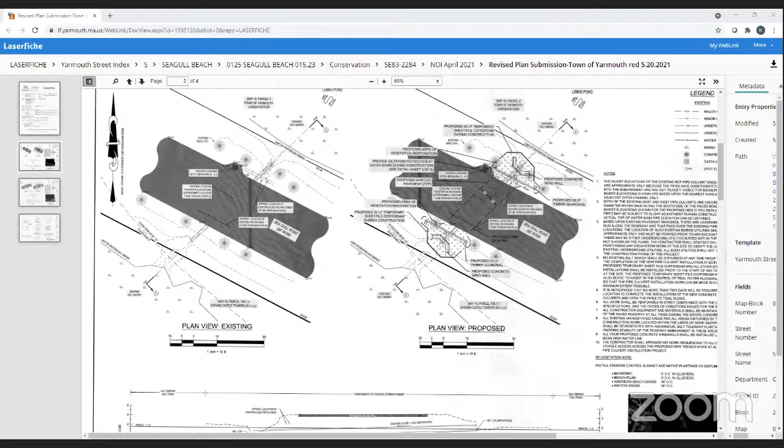Well, I think we should certainly suggest to the DPW and the engineer to do that, because sure enough, it will fail again. Yeah, and certainly from an environmental standpoint, there are impacts every time this washes out, sediment enters the water body there.

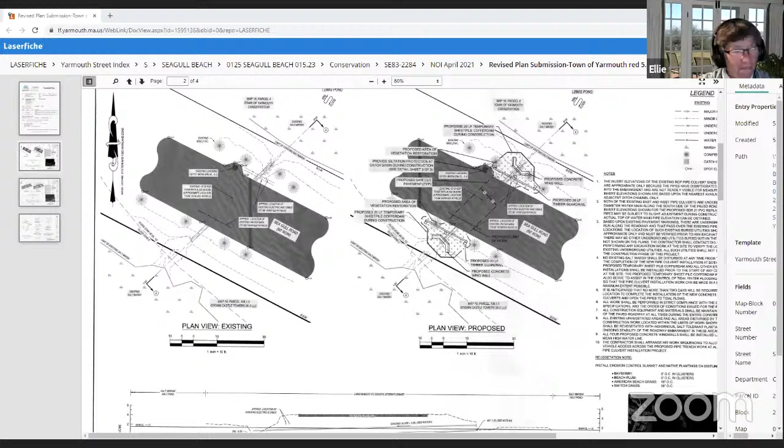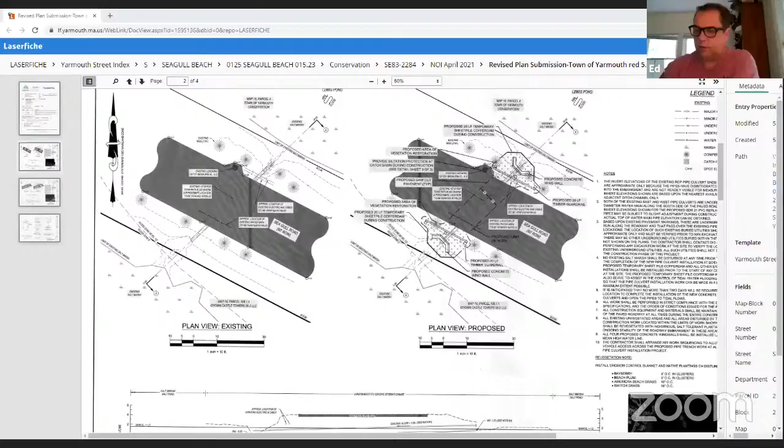Next order of business is a continued notice of hearing for SE 83-2282, Anthony Fiola, 1 Malfa Road, West Yarmouth, Massachusetts. Proposed construction of a retaining wall with fill and plantings within the buffer zone to a coastal beach and coastal bank and within the land subject to coastal storm flowage. This is being continued to June 17th.

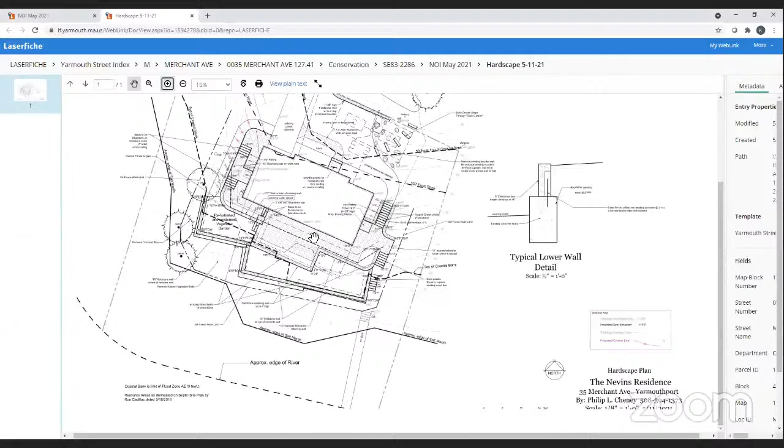Going back to, I believe, the original construction of the house in the early 70s, some massive concrete retaining walls were built on the water side of the house, currently in use as multiple levels and terraces as garden and patio. Some additional walls were built in the early 90s using pressure-treated lumber to support some of the upper levels, and those secondary walls have started to deteriorate. The project really needs some repair and rehab, and the owners would like to simplify the levels and confine the areas - smaller gardening space and patio space grouped closer to the house - and get the area back in order.

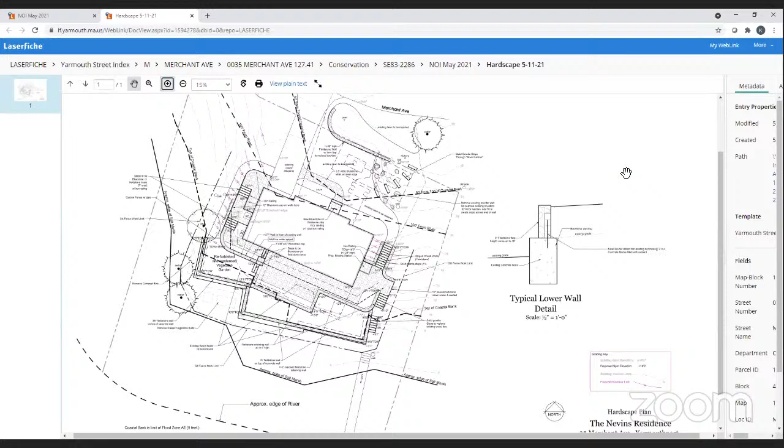My suggestion is to utilize the existing concrete walls as footings for some new fieldstone walls, which we can then use to backfill and create some planting beds, a smaller vegetable garden, and support the new patio area with a more permanent fieldstone wall, with steps coming down, fieldstone steps wrapping around from the west side up from the driveway side of the house. There's an exit door in that area as well. It's a little complicated looking at all that's going on in the drawing, but we're really just trying to simplify what's there now, utilizing the existing walls for most of the wall footprints and enabling us to get the levels up higher to minimize any need for more structural walls.

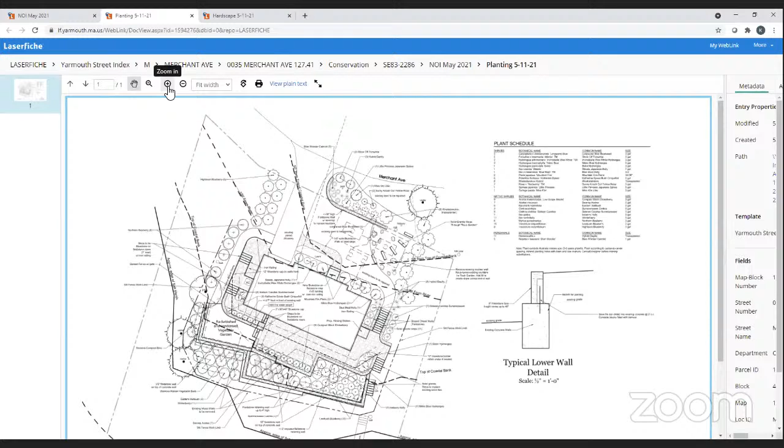We're going to utilize a lot of lower areas for some native plantings, abandoning some of the garden areas, and restore some good habitat in that area as well. On the planting plan, we're planting a number of native plants on the lower terraces closer to the water - a number of native species, using some of the salt bush down on the lowest end where there could be some flooding, and we've got summer sweet, lowbush blueberry, etc. on the upper areas. We're doing some ornamental plants right around the patio area, which is largely underneath an existing wood deck up on the first floor above.

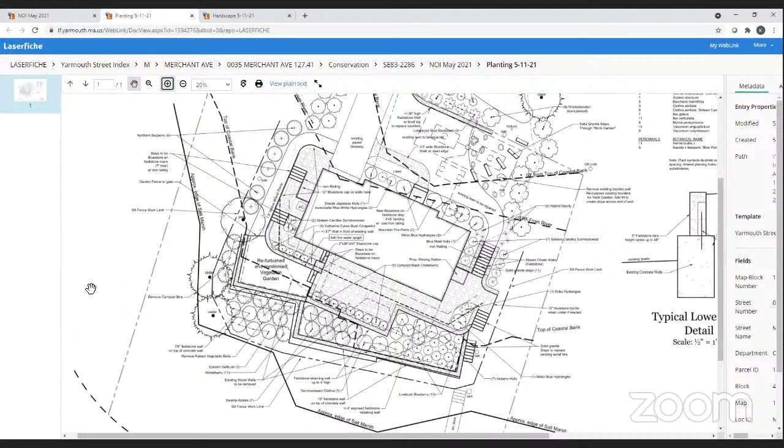Some other odds and ends we're trying to maintain: access down to the dock on the east side. Those are currently tie steps that are deteriorating - I'd like to replace those with more permanent solid granite stone treads so we can eliminate the pressure-treated lumber from there as well. On the opposite side of the house, I would like to maintain a gravel ramp to access the remaining vegetable garden space, shown on the far west side of the house near the stairways.

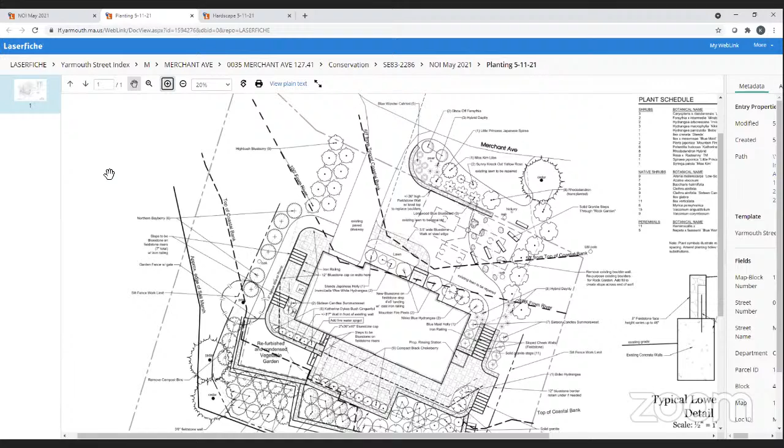Additionally, in the front yard, we just want to replace the existing bluestone walk and some retaining walls. There's a boulder retaining wall that wraps up across the front of the house, roughly over the existing septic system, and we'd like to replace it with a little bit smaller wall, more finished fieldstone, and a larger rock garden area with some stair treads up to the street. So there's a lot going on there - you may have some questions, and I'm happy to answer them.

Thank you, Paul. Commissioners, any questions? I do, Chairman. I'm fundamentally in favor of the plan, but I'm not sure if Kelly asked Paul to provide a plan that shows the existing cedar trees, the largest cedar trees that are seaward of the project. I wanted to be sure we had those on the record in case there are any future issues.

Excuse me, I think you're talking about the area between the edge of the salt marsh and the lower wall, seaward? Yes. I'm showing some of the cedar trees on the westward side, and that's just a large mass of trees that have no intention of interfering with anything. That could be a note added to the plan.

Okay, you're all set, Rick? I am, thank you. Anybody else? Is there anybody in the audience who has any comments or questions about this? Raise your hand digitally if you do. All right, Kelly, you're all set. Any questions? I'm just going to check my notes. Yes, I'm all set. Thank you.

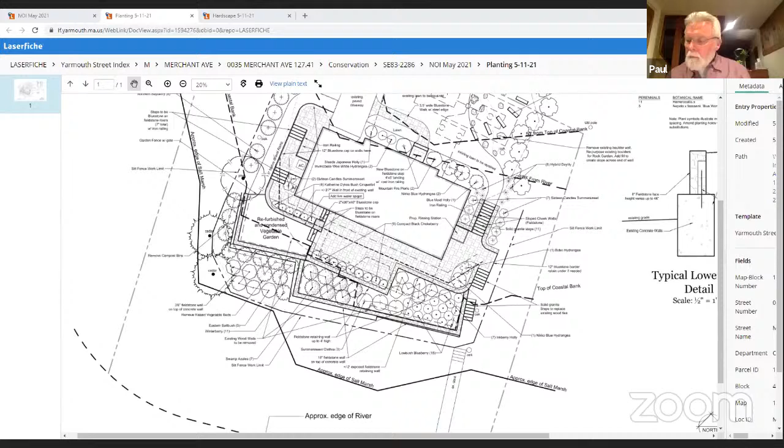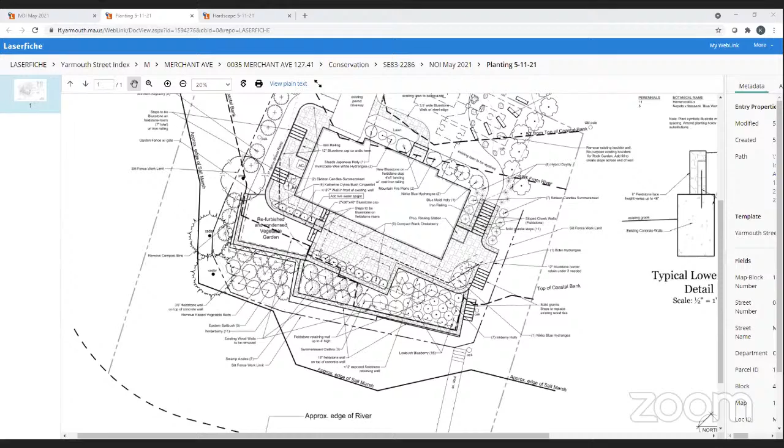You should have the report with you. Vegetation is starting to come up, but there were 4 significant invasive species identified on the site. So we recommend a revegetation plan and invasive species management plan.

Okay, thanks, Michael. We haven't decided on any dates for that, right? We were waiting for the existing vegetation report first, right? Right, okay. So before we go into that, does anybody have any questions about the revegetation report that was already issued? Everybody set with that?

Okay, then I think the only thing we need now is to look toward. I guess there are two different things: there's an issue of invasive species on the property that need to be managed, as well as the restoration planting that has to take place to address the cutting violation. I assume it makes sense that you'll want to take care of the invasives management first, and then deal with the restoration planting afterwards. Is that correct? Yes. Okay.

I did have one question. How does the commission feel about Phragmites management outside the property toward Crow Pond?